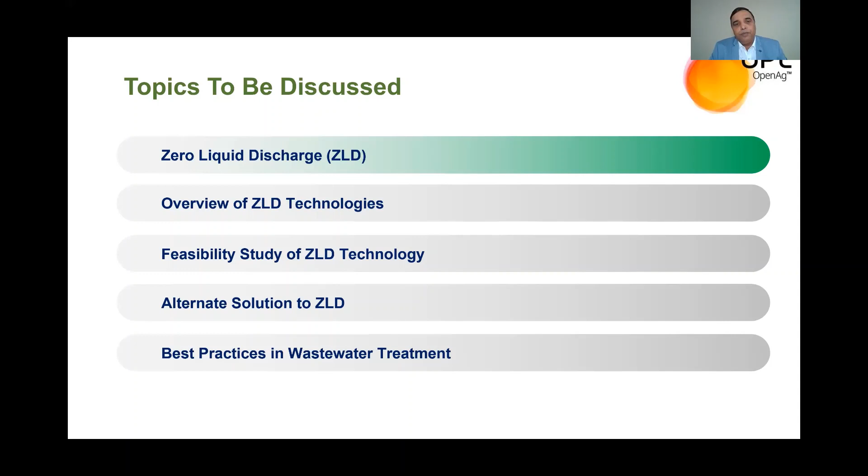Okay, so first, this is just a brief introduction of zero liquid discharge. So zero liquid discharge means that whatever waste we are generating inside the premises should be treated in such a way that all the water we reclaim inside the premises, and only solid waste goes to the secured landfill site. So actually in ZLD, our approach is to recover 100% water, and only solid waste needs to go to the secured landfill.

And here I think ZLD is good for those areas where there is not adequate facility available for the disposal of treated wastewater, and also the water scarcity is extreme. But in this discussion, we will discuss the coastal area, especially areas like Ankleshwar, where we have very good facility of effluent discharge into the sea. So we will see whether ZLD is required there or not. And during this discussion, we will find the answer.

Now coming to ZLD, normally if you see the conventional practice in industry at this moment, first people send the effluent to the effluent treatment plant, and they do the primary and secondary treatment. After that, they adopt membrane technology, which may be UF and RO. There they concentrate the salt up to 6 to 8%, and the brine or reject of RO they send to the evaporator and later on the crystallizer. So combined we say MEE, multi-effect evaporator.

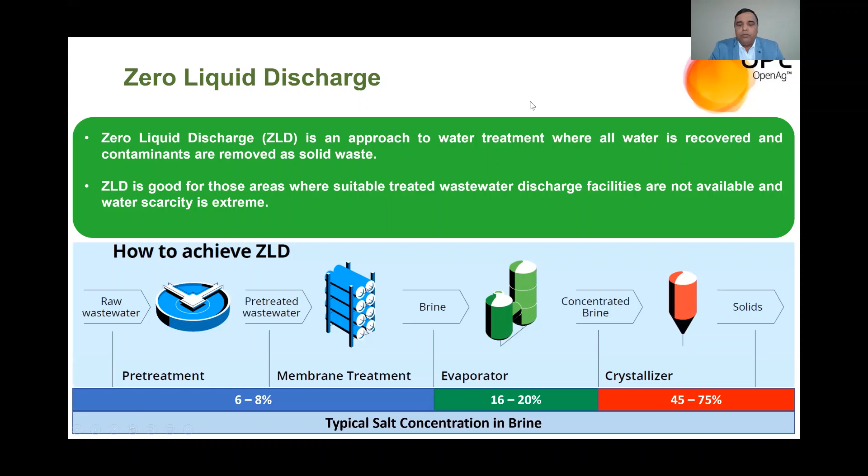Karthik, go back. I will come to this. This is a treatment scheme, but let me first explain the technologies. So RO, I will not go into detail because people know it very well. Third is forward osmosis. Karthik, go to the next. Yeah, there is a timeline, sir.

So forward osmosis is a technology which uses a draw solution for the effluent, and it is a very good technology to treat high TDS and low COD effluent, and the power consumption is very minimal. For the first time in the chemical industry, UPL has installed forward osmosis. We have installed it in our Ankleshwar Unit 1, and this is the first time in the chemical industry worldwide that this technology has been adopted, and it is very good for effluent with low COD and high TDS.

And the last technology is MEE, multi-effect evaporator. That is also working inside our plant, and we use this technology only in situations where very high COD, very high TDS effluent is coming and it's not possible to treat it with Scale Ban, RO and FO; only then do we utilize MEE technology.

So now I think the summary is this: the concept of establishment of ZLD may be good, but it cannot be generalized and implemented over the entire country, as it's emitting more CO2, more carbon emission happens, and more hazardous solid waste is associated with zero liquid discharge.

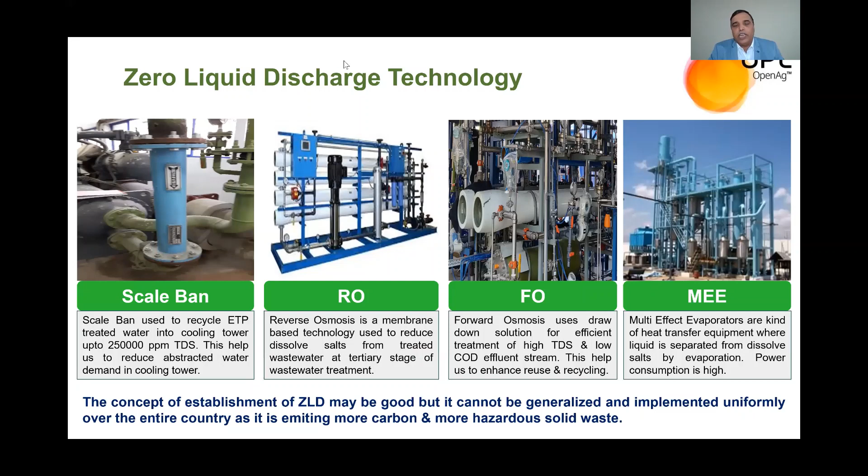Now go to the next slide, Karthik. We will go on the next slide where I shall take time to explain how we have adopted zero liquid discharge inside our UPL operating plants. And here you can see in the slide that first we have adopted stream segregation. In the normal conventional method, people used to send all the effluent to one place and then treat it with a common effluent treatment plant inside the operating plant.

But at UPL, we have adopted the approach of segregation first, and we have segregated the stream into green stream, yellow stream, and red stream. Green stream effluent means TDS below 5,000 ppm and COD less than 10,000 ppm. All the effluent coming in this range we call green stream, and we segregate it at source and send it for biological treatment, which normally is activated sludge process or moving bed biofilm reactor.

Then yellow stream we segregate where the TDS is below 1 lakh ppm and above 5,000 ppm, and COD is below 20,000 ppm. This we send to forward osmosis or OH radical, and here we use advanced oxidation or advanced membrane technology. And the third stream we segregate as a red stream, where very high polluting, high COD and high TDS effluent gets generated, and that we channelize to a multi-effect evaporator. So I think it is very important for industry to first segregate the stream into green, yellow and red.

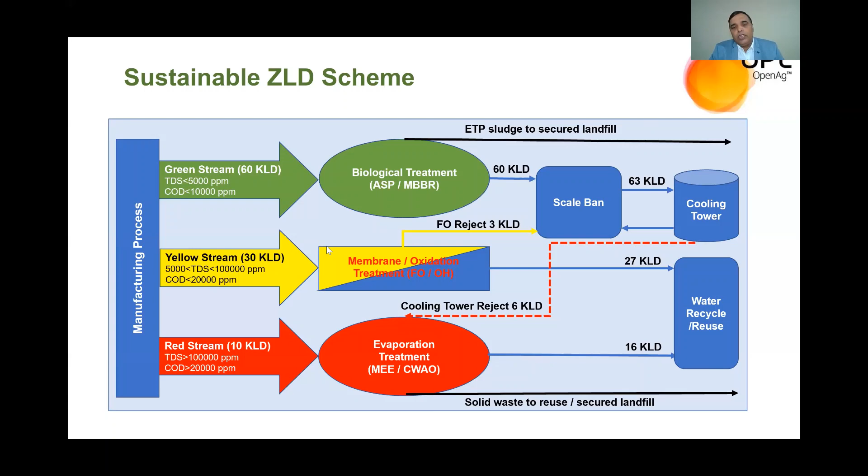Only the solid waste which gets generated from the ETP and from the MEE area goes to secured landfill. So this is the way wherever we want to implement ZLD at UPL, and that is the one sustainable scheme which I have shared with the audience. So go to the next. In the next slide, we will see the economics and other things in zero liquid discharge.

So the slide is getting changed. The slide is shared, sir. Karthik, change the slide. I have changed it, sir. I changed the slide. Sir, is the slide visible to you? No, not changed. Still not. Sir, it is the ZLD technologies at a glance. That's the slide, right? But it's not coming on the screen. It is not reflected here till now. Now it's coming.

Yes. So this is a very important slide where we will understand how power consumption and capital cost are associated with various ZLD technologies. I have explained that there is Scale Ban, there is RO, forward osmosis, vacuum distillation, and multi-effect evaporator. You will see the power consumption is very minimum in Scale Ban.

It is up to 2.5 kilowatt hour per cubic meter of product water produced. Then RO consumes slightly more power than the scale ban, 2.5 to 5 kilowatt hour per cubic meter of product water. Forward osmosis consumes even more power than the RO.

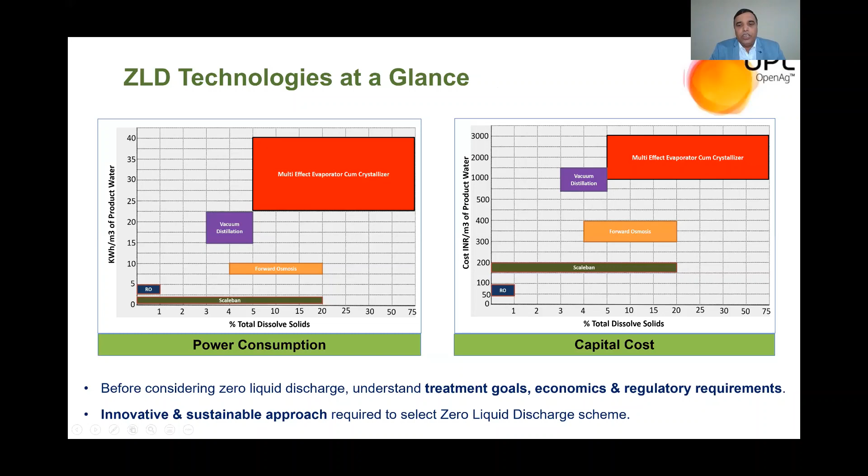So I think this is the main economics associated with various ZLD. Later on, we will see the cost difference between ZLD and other technology. Now, this is one slide where you can see that at UPL, we have adopted ZLD at 60% of plants globally. You can see the picture of one plant, unit 2 at Ankleshwar, where we have achieved zero liquid discharge. At Tarapur we have achieved zero liquid discharge, and also at the Halol plant.

Go to the next slide.

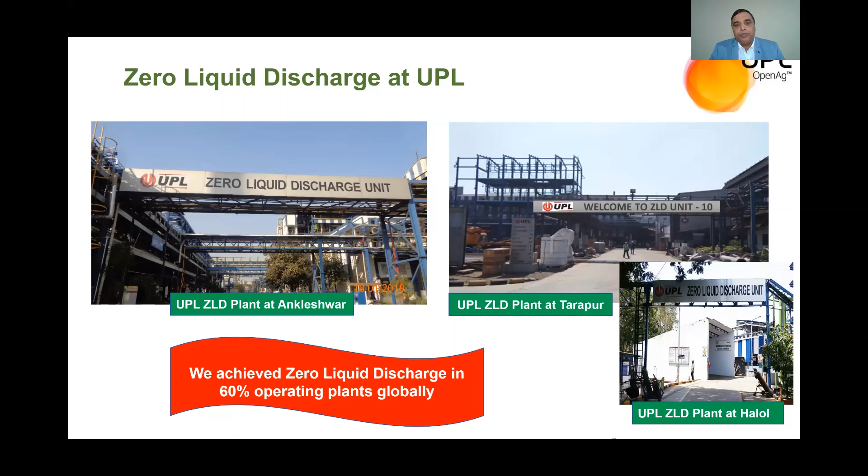So at this moment, globally, 60% of our operating plants are zero liquid discharge. Now this was about the ZLD. Now let us see the feasibility associated with ZLD. My personal view, because we have implemented several ZLDs inside UPL, I have also been associated with implementing ZLD at Unilever. I had worked in SAIL also.

So I have nearly 23 years of global experience, and I feel that ZLD is not an environment friendly technology, especially in coastal areas. In coastal areas, ZLD is no more environment friendly, and that's why we don't recommend ZLD in coastal areas. And here is the reason. First, see the environmental feasibility.

So what I have done in this presentation: one case is if ZLD is not there and we just implement an effluent treatment plant and discharge treated water to the sea or a suitable discharge system. The second case is if you want to implement ZLD. So there is a comparison. For a conventional treatment plant, where you achieve the required result and send the treated effluent to sea discharge, the power consumption is very low.

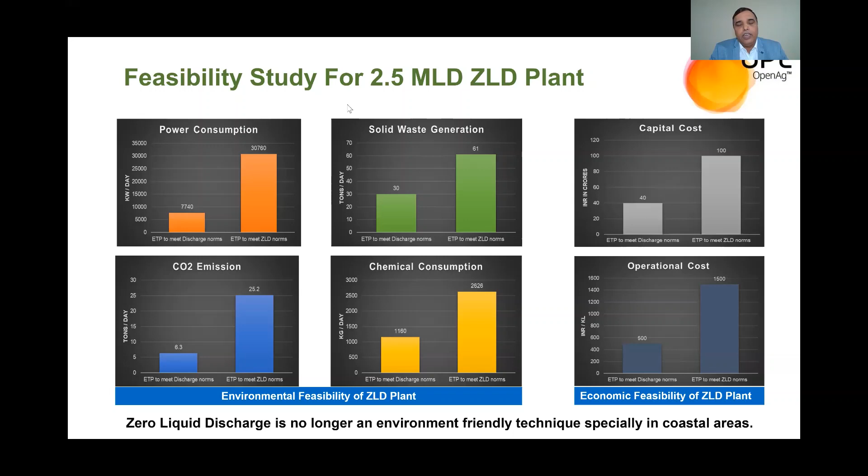Go to the next slide. Next slide will be just a summary of what right now I have explained. No, go to the back, yes. So this is just a summary of how the power consumption is associated in ETP to meet discharge norms and ETP to meet ZLD norms.

And very clearly you can see that power consumption is 4 times higher, CO2 emission is 4 times higher, solid waste generation is 2 times higher, chemical consumption is 2 times higher in ZLD, capital cost is 2.5 times higher, and operating cost 3 times higher in ZLD. Now go to the next slide.

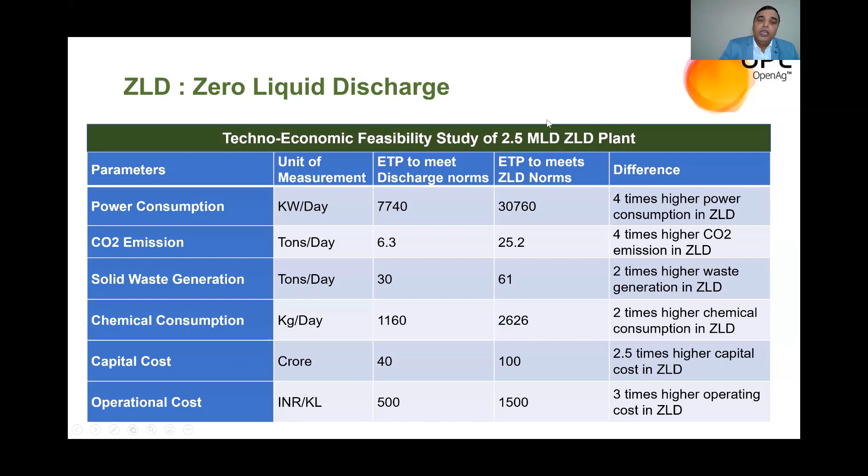Next slide, we will understand what is the alternate solution of ZLD, and that I want to cover at the end of this, because if we don't want to implement ZLD, then what is the alternate solution, especially in coastal area? And here you can see the ZLD water cost is 750 to 1200 rupees per cubic meter.

And if you install desalination, means in coastal area, a very good amount of seawater is available, and we may have a desalination plant, and if we can install it, then we will get water at 50 to 80 rupees per cubic meter. So desalinated water is a better choice than ZLD water. Then the third option I have compared, sewage water.

So normally right now the municipality is treating the sewage and then discharging it into the water bodies. I think the better option is those treated sewage can be made available to industry, and if we treat the treated sewage, the cost of treatment will be between 30 to 35 rupees per cubic meter, and using treated sewage will be a better option than the ZLD water inside the plant.

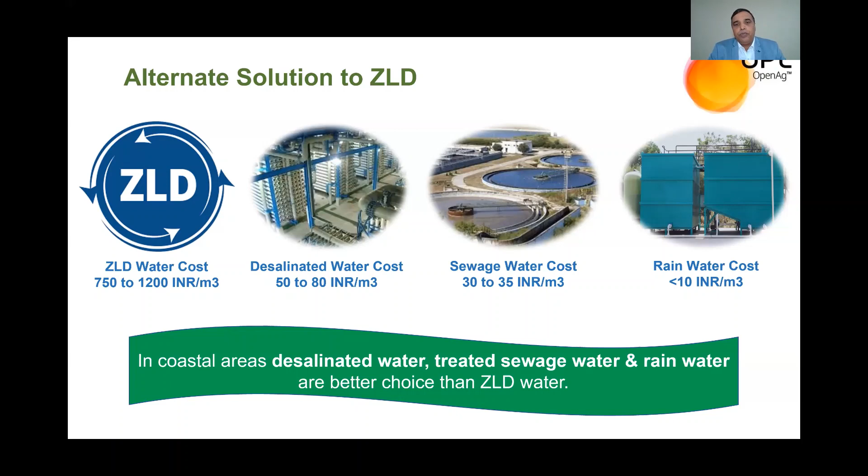So I think this is the slide where again we are discussing that inside the industry we should adopt certain good practices. Instead of ZLD, we should focus on the fresh water consumption at source itself. And at this moment of time at UPL, what we are doing, we are focusing more toward reducing the water

at source itself. And we have taken a target in 2016 that by 2020 we will reduce 30% water consumption at source per cubic meter per ton of production, and that we have achieved. Now again we have revised our target that by 2025, further from the 2020 baseline, we will further reduce 30% water consumption inside our plant.

And I think that is the best sustainable way, where we should work to reduce the water consumption at source itself rather than concentrating on zero liquid discharge. Second best option is effluent stream identification, characterization and segregation. I think this is one way by which we can treat our effluent in a better way, and the performance can be enhanced, and this is the best way of effluent treatment.

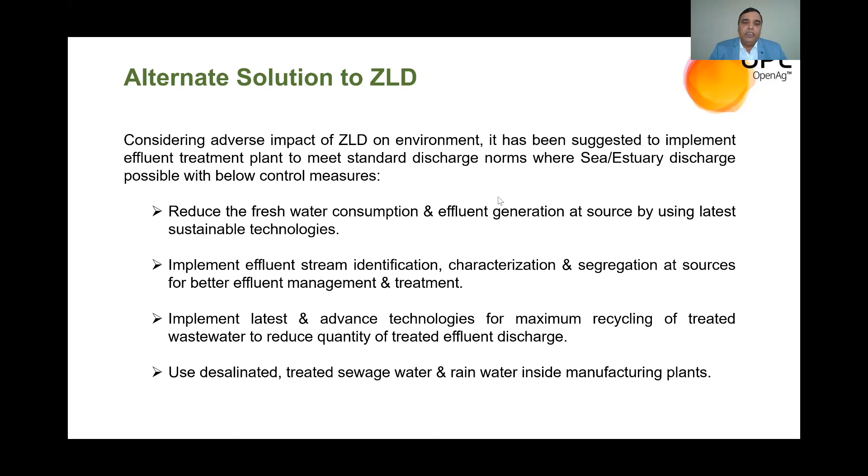Next slide, we will see what the best practices in wastewater treatment are. If you see here, the best way is to first work on reducing water consumption at source itself. The second best option is recycle: you maximize the recycle of water inside the operation. The third priority is segregate, where, as I told, you segregate the effluent and then treat it inside the ETP. The next option is to treat very well such that it can meet the discharge norm.

Incineration and disposal is the last option. I think we should try to avoid incineration as much as possible. That's the reason we should not adopt more and more MEE, because MEE is also nothing but incineration, and we end up with huge carbon emission and solid waste generation. So the summary is that we must adopt a structured approach inside our operation to manage complex effluent treatment. Go to the next.

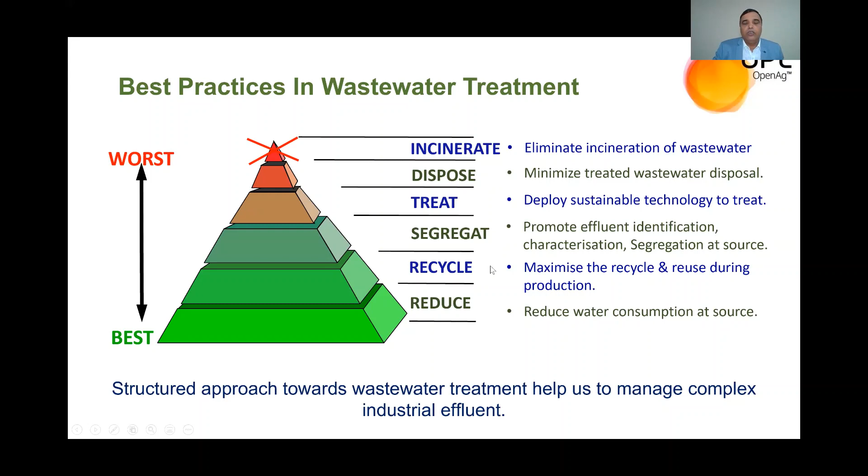In the interest of time, I will summarize my presentation, and the conclusion is this. The conclusion is that the concept of establishing ZLD may be good, but we cannot implement it over the entire country, and we cannot make a uniform regulation for the entire region or country to go for ZLD. ZLD may be good for areas where treated wastewater facilities are not available and where water scarcity is very extreme. In those areas we can partially adopt ZLD, but ZLD is not good for the coastal area.

Third, our conclusion is that in the coastal area, ZLD is no longer an environment-friendly technology. In the coastal area, we must focus on a very good deep sea discharge facility where we can treat the effluent well and send it for deep sea discharge disposal. For water, we should concentrate more on desalinated water and rainwater, and treated sewage water can also be utilized inside the industry. Those are more economic and better options than ZLD water.

For industry, the summary is that we must adopt a structured approach toward the effluent treatment plant, adopt sustainable technology, and think about how we can reduce our environmental footprint, especially water consumption and CO2 emission. At the same time, we want to request our regulatory bodies, especially the Ministry of Environment, Forest and the Central Pollution Control Board, to please study the ZLD concept, and ZLD should not be made mandatory in the coastal area.